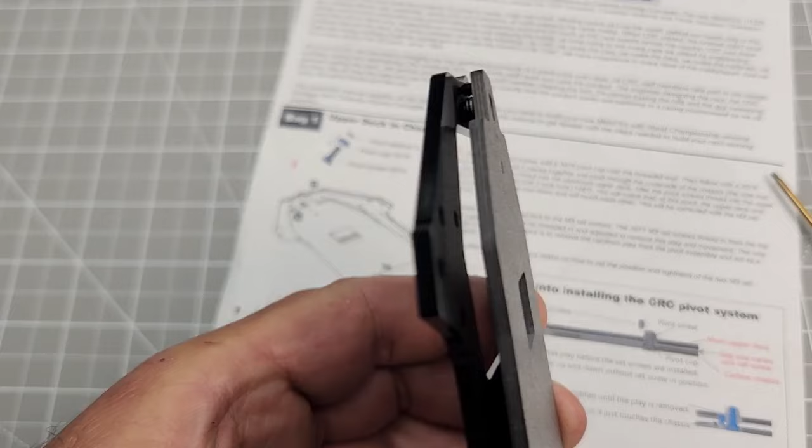So these set screws on the top will just be brought down just so they touch. So we'll just bring these down. And when they just touch, the upper plate will be free, but not bound, and pivot really smooth.

So I'm going to over tighten them on purpose, and I just snugged them a little too far. And you can see the upper plate isn't happy. It doesn't pivot real, it doesn't wiggle or slap around, or it doesn't pivot very good at all. So now we'll just take and loosen these just slightly, and again, we're just getting these set screws just a touch with and remove any of the play up and down.

And of course, all of these screws should have a little Loctite on them. So now that we've got it correct, you can see a nice free pivot, and it's just really very free in the pivot system, and there's no play in the screw going up and down. So that pivot is basically done, and you can see from the side here that set screw is just touching the carbon, and that's what you're after. Again, all those screws there should have a little drop of Loctite.

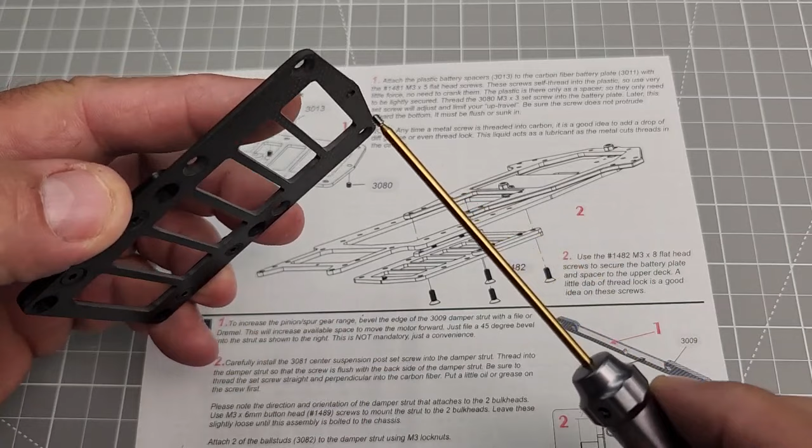Just to, okay, even though we've used some Loctite, we're going to go ahead and put some lock nuts on those pivot screws, just a matter of putting a lock nut on top. So be sure to hold the bottom screw when tightening the lock nut up on top.

And then that next step is really super simple. Just these little spacers go on top of the battery plate. The only reason we're showing it here is they're just spacers. You don't need to crank down on this very tight. You're just going to run these M3x5 flatheads up through into the plastic spacer and just really lightly snug it. It's just taking up space, no structural worry, no need to reef on it, no need to go crazy. Just simply thread it in and just 2-finger tight. It isn't going anywhere, it's going to be compressed between the upper plate and the chassis. So really no need to go crazy with it. So a piece of cake there.

Just one thing to note on these little spacers is you want this flat side. That's where the battery is going to go in. You see the rounded edges here, and the flat side will go inside toward the battery.

The next step in this is the extension limit screw 3080 is going to go up into the bottom of the chassis, or battery plate, sorry. That's super simple. Just keep it square and true, and just thread that stop screw up in, and it's really quite simple. Just make sure it's pass flush so you don't have anything dragging underneath the car.

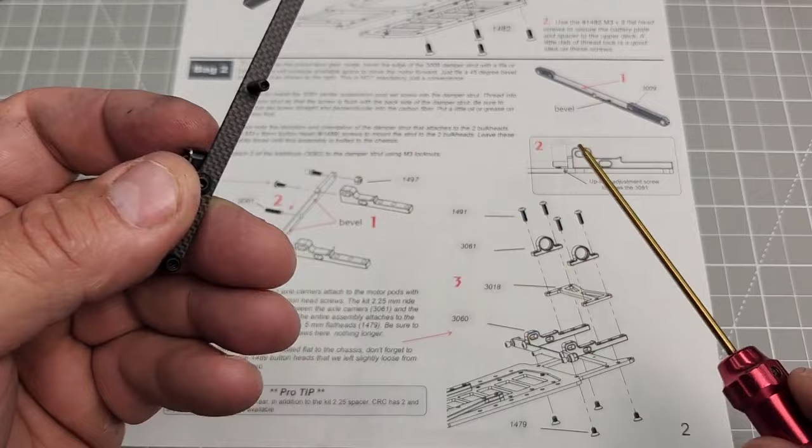And basically the battery plate's ready to bolt onto the upper chassis. Here we're going to bolt the battery plate to the upper chassis with these 3x8s. These are going in aluminum, so a little Loctite wouldn't hurt to keep that secure in the aluminum. Again, it's just nothing more than threading these in. Super simple. And just get them snug tight, and the battery plate is on the upper chassis.

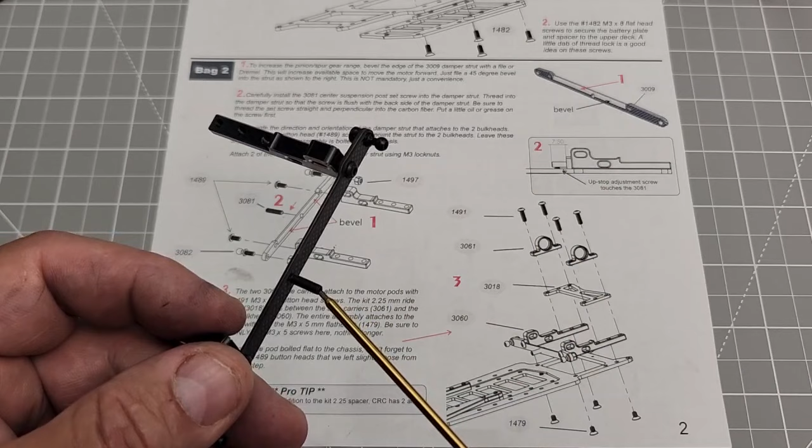And this is the battery plate attached to the upper chassis with the 4 M3x8s. And you got your extension limit screw there, pivots, battery plates in, and kind of already looking like half a car.

Okay, now we're putting the pod onto the chassis. Really simple, kind of just a bolt together situation. The only thing tricky is this set screw going into the carbon. Needs the thread in straight and true. A little Loctite or even grease will get that going easier. It's a super easy install.

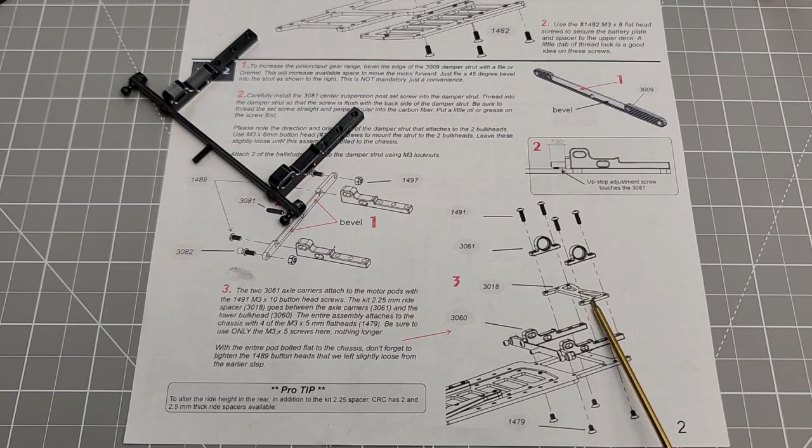The hole is sized very simply to just thread that in and keep it square and true, and you'll know you're about at the right length when the back here is flush with the back of the carbon. You should have 7.5 millimeters from the tip down to the carbon, as shown right here in the instructions. If this screw is sticking out too far, it will hit your battery, so this is key to keep an eye on.

Then you're just going to continue on with this. Put the ball studs on, screw it into the motor plates, and this whole assembly will go onto the chassis as shown down here. Just be sure to use the 3x5 millimeter flatheads here, don't use anything longer, that'll cause an issue. And as always, whenever you have a metal screw going into a metal piece, a little drop of Loctite won't hurt.

This is a 2.25 thick spacer for ride height, that's what comes in the kit, and we offer a thinner and a thicker. This will get you going around 40 millimeter tires and 3.5 to 4 millimeters of ground clearance, a good start. The team, when we race, is typically only on the stock one at 2.25. Typically works good, but we do have a couple adjustments there.

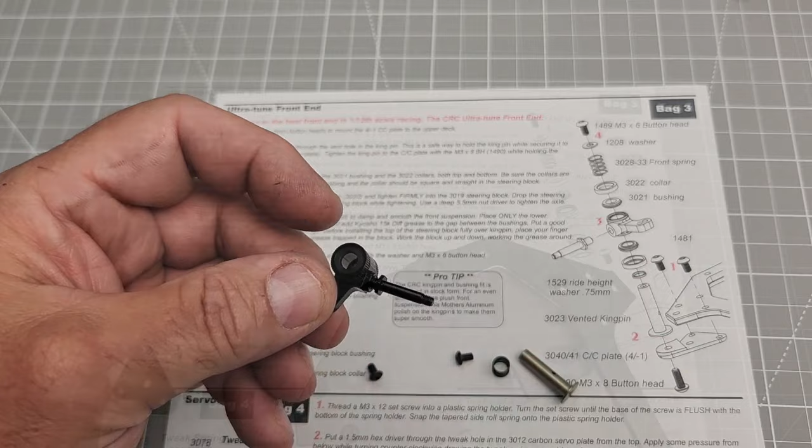So that's about it for the rear pod. One word of note: when you're putting the pod to the chassis, keep all of the screws a little bit loose until the 4 screws that hold the pod onto the chassis are secure. You'll see that the pod locates or keys into the chassis, kind of clicks in, and then you can secure it with the screws from the bottom. Once those 4 are tight underneath, you can go ahead and tighten all the auxiliary screws around it, like these 2 in the front and these 4 in the back. That'll just keep things real tweak-free, square, and really bulletproof. You see here's your stop screw sitting right above your adjustment, and your spring's going to come down and touch that. So that completes the pod.

Okay, onto the UltraTune front end, and yes, welcome to the best front end in 1/12 scale racing. We've got quite a really unique front end in the sense that it's very easy to change caster and camber. We use the 1/8 inch bearings for more durability. Here's a brand new one with no polishing, and the fit and finish is top notch, nice and smooth.

Hollow kingpin to hold more fluid, works really well. Got the aluminum collar, Delrin machine bushings, and a 1/8 inch steel axle that threads into the steering block.

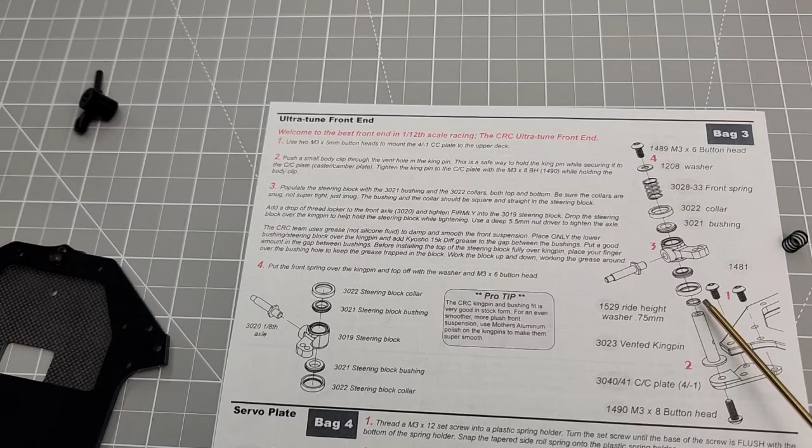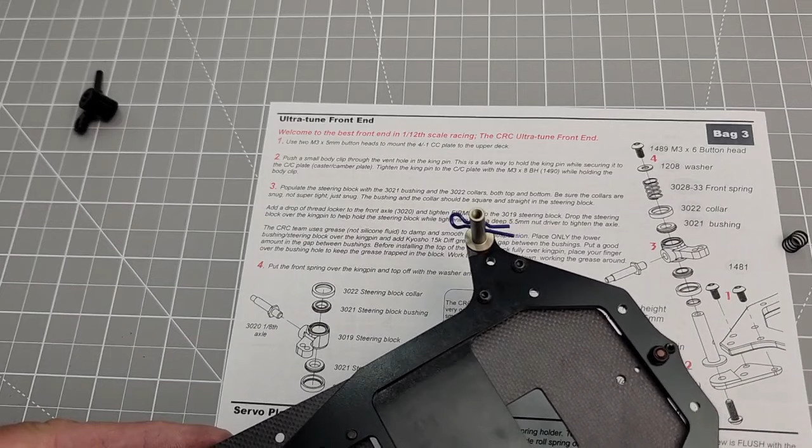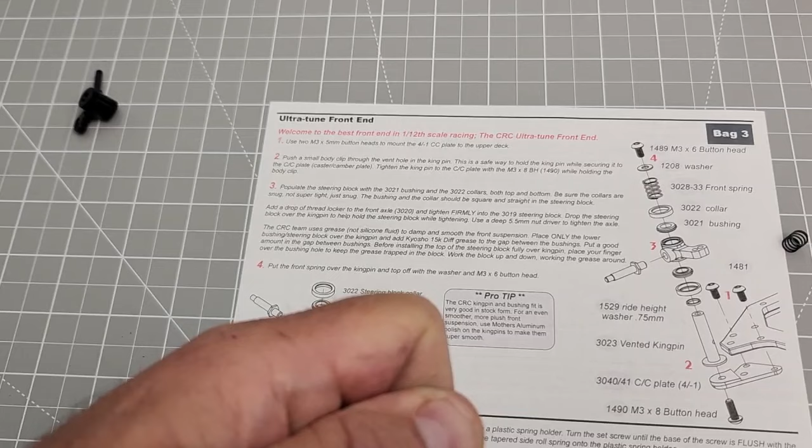And we'll go ahead and put this all together. Here's some of the magic of the UltraTune front end, this is your CC plate. The car is going to come with a 4-caster, -1 camber plate, and that'll machine match right into the upper chassis. You're going to use 2 M3x5 screws with a little dab of Loctite on them to hold those. Snug it down pretty good, and the basis of the front end is now on.

You'll do that for the right side, but we've got a whole range of camber caster plates, 4 degrees with just 0.25 negative all the way up to 4 with -2 degrees camber. And we've got the same thing pretty much in 5-degree caster as well. So that's a bolt on and go, and the basis of the front end. Kingpin will go on there in the steering block, and we'll be off to the races.

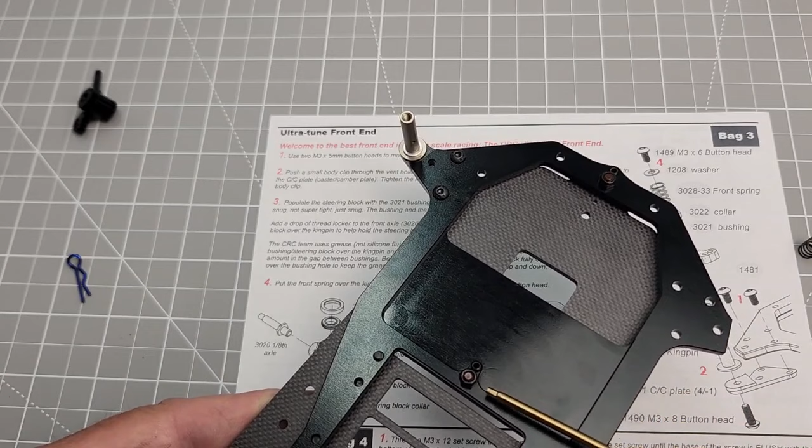Okay, following along with the instructions, you're going to bolt your 4, -1 camber caster plate to your upper chassis plate. And then, of course, your steering block, which already has all the bushings and collars together, will come down over the kingpin. One tricky thing is trying to hold the kingpin while you're tightening it, so we give you a body clip to use as a wrench. Stick the body clip through the hole, get yourself a good 2 mil, and just use the body clip as your wrench and give it a good crank. Of course, a drop of Loctite will help there, and now that's good and tight, and we can move on.

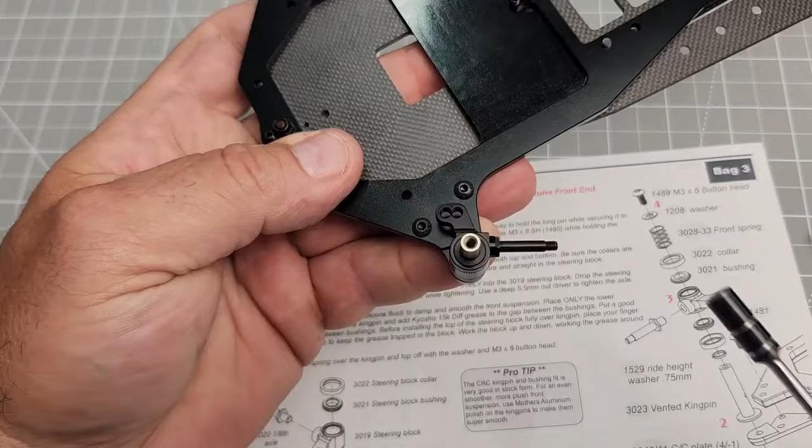These little 5mm spacers are 0.75 thick, a good start for ride height. You can use 1 or 2 of them, they come with 1, again pretty good for 40mm, 39mm front tires. You can change the ride height by putting a spacer there. You can also change the ride height in the front by changing the amount of washers in the pivot, so you can leave this washer and raise the whole upper deck a little bit.

Yes, you're raising the weight of the speedo a little bit to change ride height that way, but you can do it. So you can change the front ride height here with a washer, or actually you can raise the upper deck a little bit. Again, if you raise the upper deck, you'll have to readjust your set screws.

So per the instructions, we're going to use that 0.75mm, and then put the steering block over. And again, super smooth, no play.

Now here's a trick. You're going to want a nut driver that totally is able to go over the hole, have it bore deep so you can go over and catch it. And you can actually use your kingpin as your wrench.

This is something you definitely want a good Loctite on, and you want to tighten this one. Put some heat on this one and tighten it really secure, because a little Loctite and a good twist to get that good and tight will keep that axle on for good.

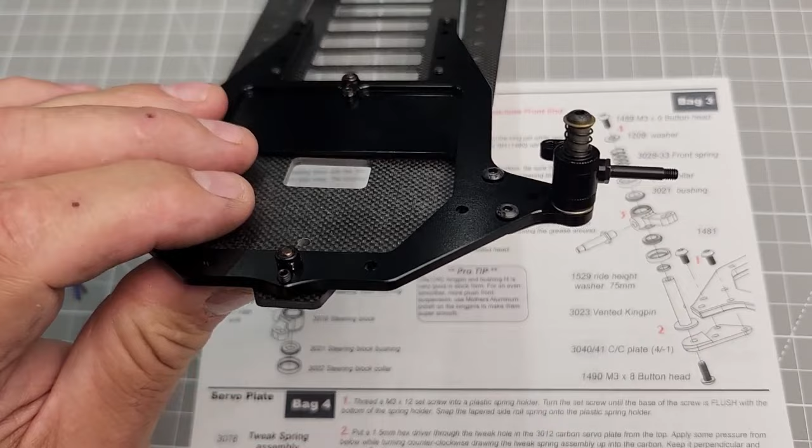And basically, you can see your ride height washer in there. Super free, super smooth. And if you want to get it even better, you can polish that kingpin. So far, the fit and finish has been right on the money. Don't really need to, but if you want to use some Mothers, you can make that even better.

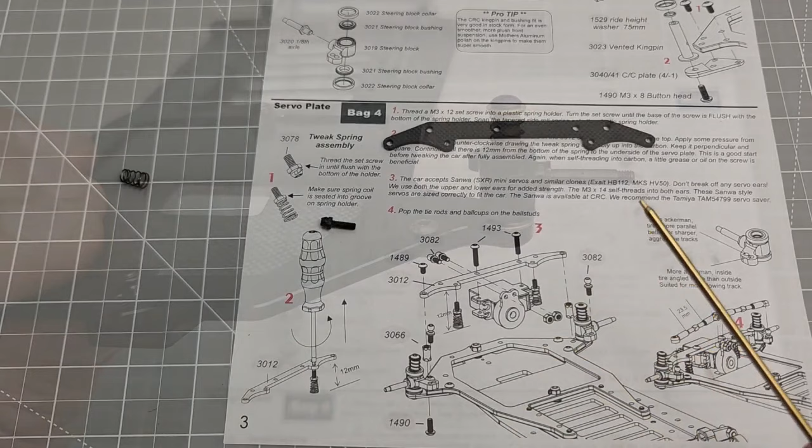Okay, again following along with the instructions, we're just going to drop the 55 front spring on, and we're going to go with our top screw to hold everything together. And if you want to play with preload, we're going to have a fine-tune video and some instruction on how to fine-tune the front end.

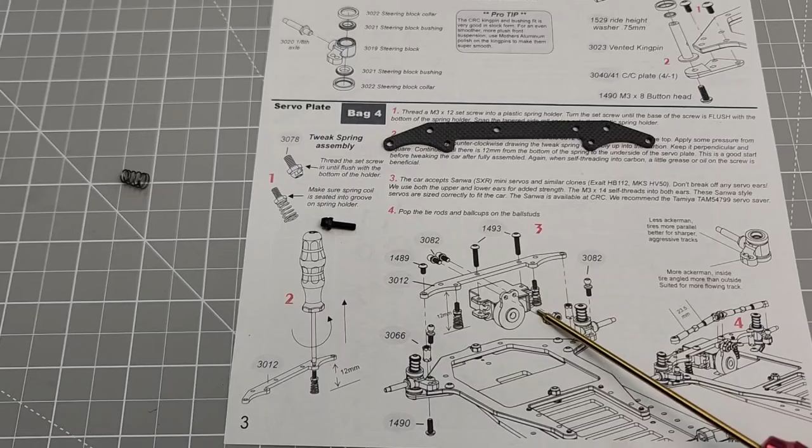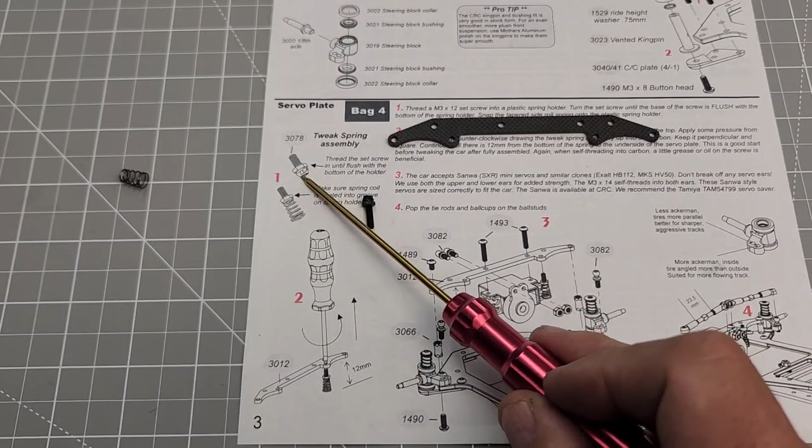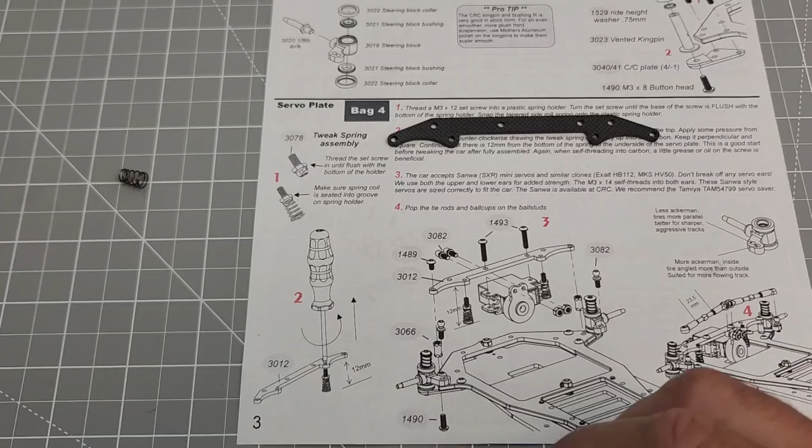Right now you could use a 5mm shim on top and actually preload the front spring. There's a number of ways to do it. Certainly a 5mm shim will tighten that up. But right now we're just going to go with stock preload, which is just the washer and the button head from the top. Again, metal to metal, make sure you're using a drop of Loctite, and instantly you have 4 caster and -1 camber.

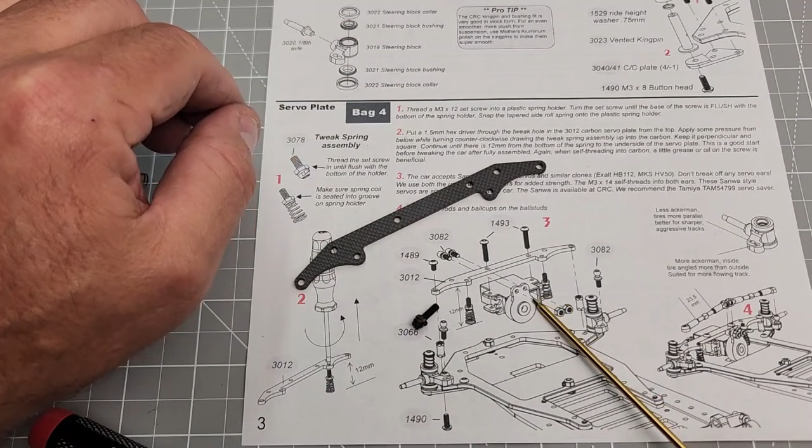No setup gauge, it's machined in. This kingpin don't spin. Yeah, we've hit some walls really hard. I'm sure you can bend it, we haven't yet, but we will. But it stays really true even in a big accident. So the front end's proven to be excellent.

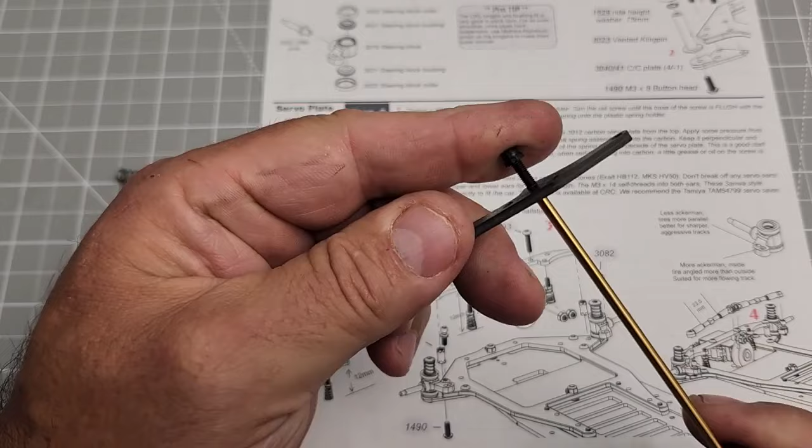All right, so we're going on to the servo mount. You just got to finish up the front end, and you'll end up with both sides on with the springs on both steering blocks. And now we're going to move to this area where the roll springs thread into the servo plate, the carbon servo plate.

First thing you got to do is get this assembly together. And you're going to get this set screw flush with the bottom of the spring holder. Nothing to it, pretty much just like the instructions said.

So you're going to run that set screw into the spring holder, and when the bottom of the set screw is flush, that's good and far enough. That's what I'm doing here. Now let me take it out. Yeah, it's about flush, pretty close. Let's go a little further.

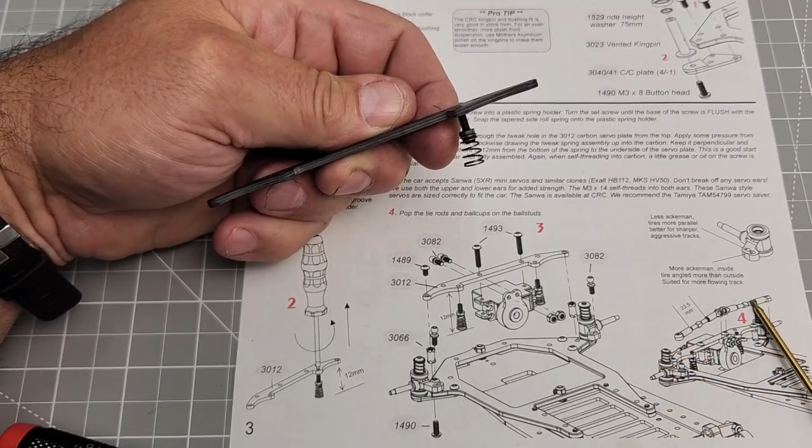And then, without putting the spring on, basically you have to determine if you want your servo left or right at this point. It's shown with the base of the servo to the right in the car, so we'll go ahead that way.

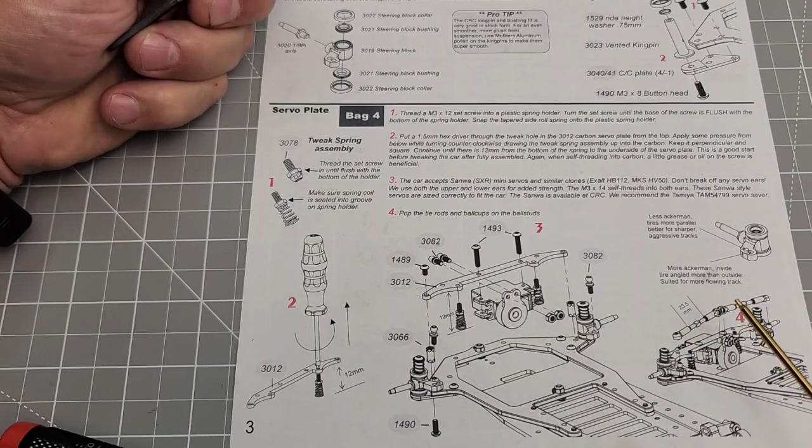I like to put the wrench through and bring your set screw from the bottom, and just push with your finger, and you're just trying to keep it square and straight. Again, a little bit of Loctite or even grease, anything to help that set screw get in the carbon.

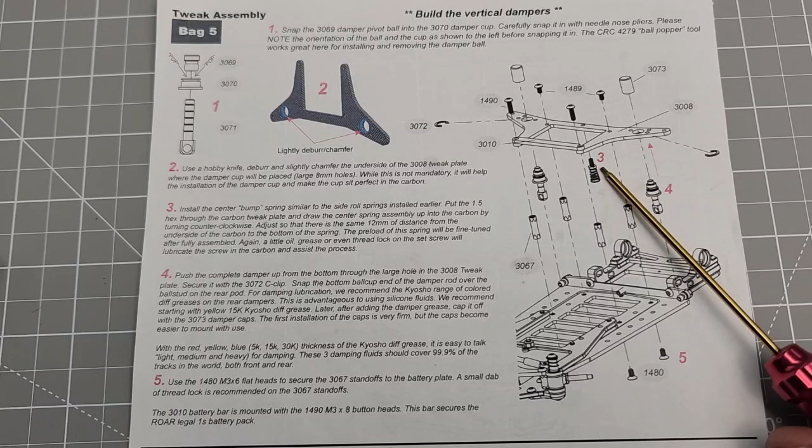And that does that. And then you're going to pop your spring on, and then you're going to measure from the bottom of the spring to the underneath of the carbon, should be 12 mil. That's just a start—once we get it all on and tweak the car, that'll change, but you're going to start with the bottom of the spring to the bottom of the carbon, 12 mil.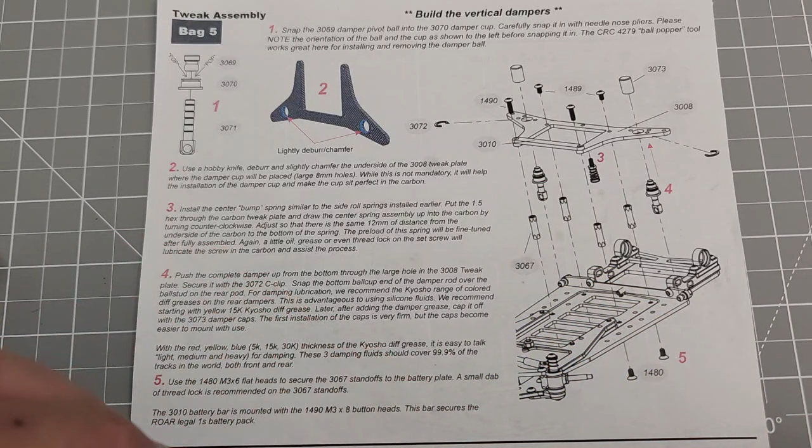Do that for both sides, and mount to the rest of the servo. We're not going to show everything, it's pretty much listed here. You got your tie rods. It's all pretty straightforward. I suggest you start with the outer hole towards the outside of the car—that'll give you more steering. And that'll be your front end.

All right, moving on to the tweak assembly. Again, these videos are just to highlight some of the more tricky items. The car build's really straightforward, and we're not going over every step. But anything that might need a little extra care or a note, we're trying to target in these videos.

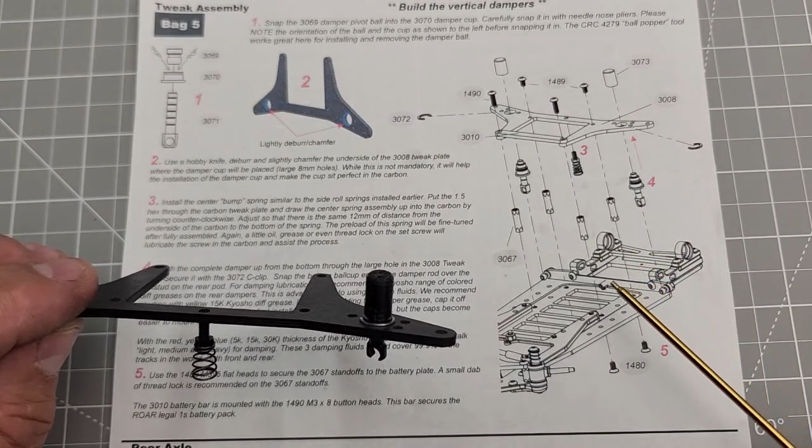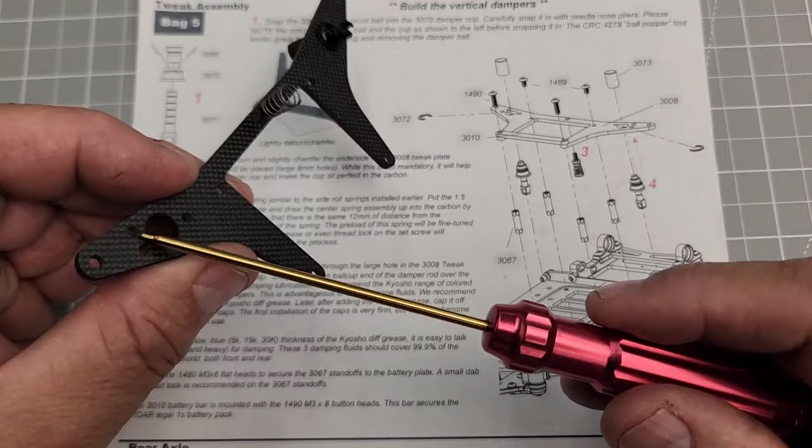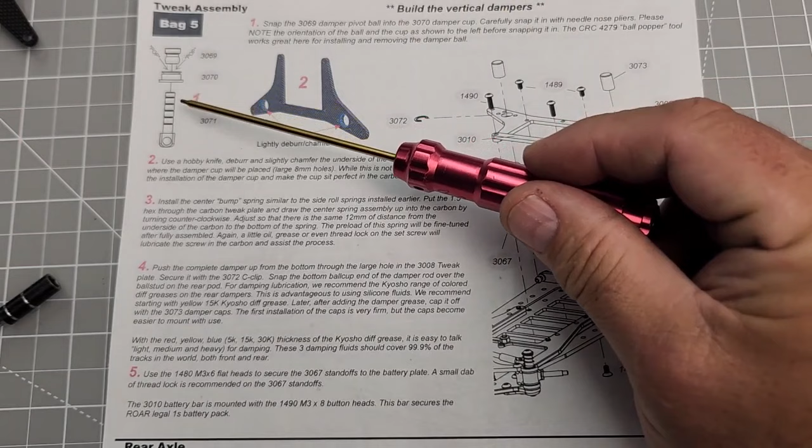Here, the center spring is much like the roll springs. You'll put the set screw into the spring holder, much like we did on the roll spring, so that the set screw is flush with the bottom of the spring holder. And then again, just like the roll spring, we'll put our wrench through the carbon, and we'll put the set screw here, and then draw it in, basically unscrewing it.

Again, a dab of Loctite or grease. We'll just make that go in smooth and just try to keep it straight, pushing with my thumb and just kind of drawing it in.

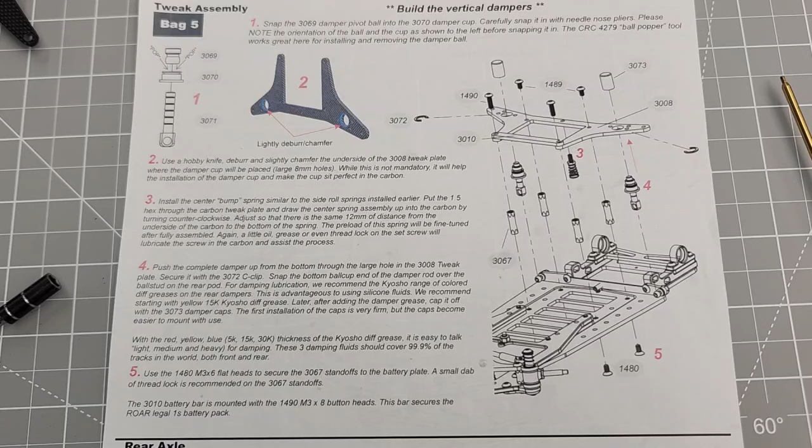And once we get that in square, again, same 12 millimeter gap between the bottom of this carbon plate and the end of the spring when we push the spring on. So that'll be the same. That'll be adjusted later, and that spring will sit right on that center post that we installed earlier.

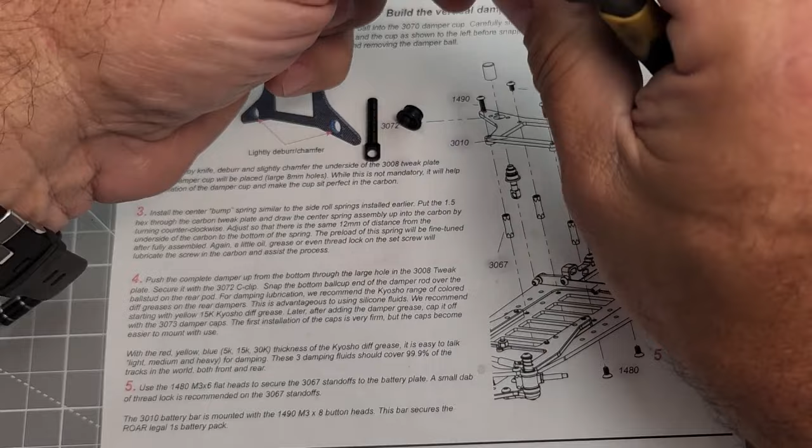The other thing on this step is, you see here highlighted in blue, you might want to just take the sharp edge off in this area with an X-Acto, anything to deburr it. Don't have to do it, but it makes the assembly a little better.

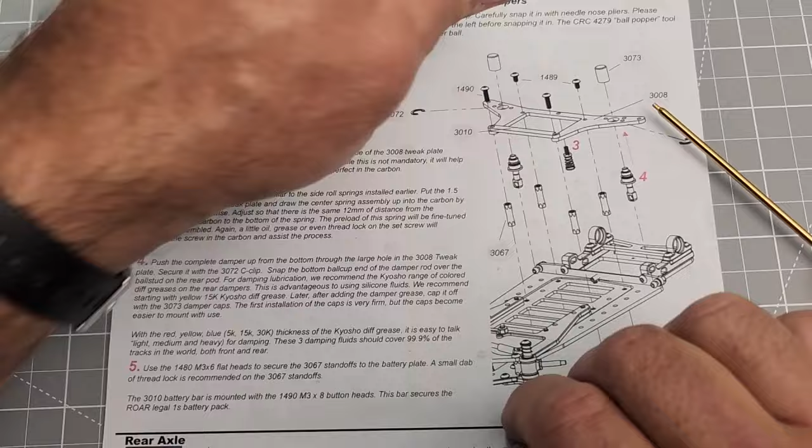And then what we're going to go on to next is the vertical dampers. I'm going to pop the damper ball into the damper cup. And then this is the damper rod. We'll push that up through, put a little Kyosho grease on it. And that'll be our damping.

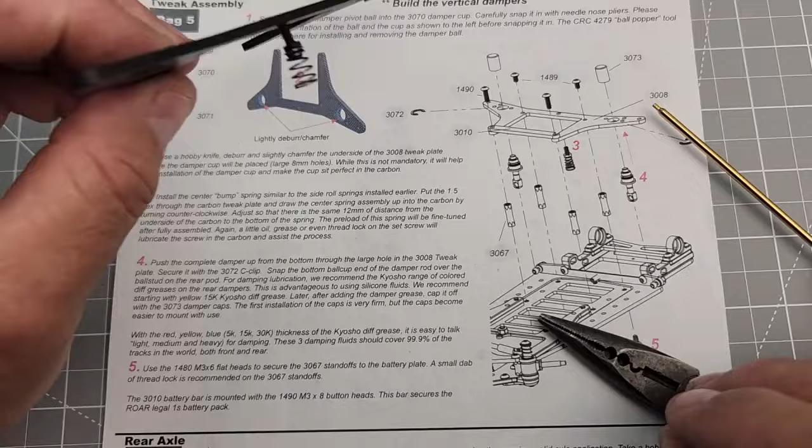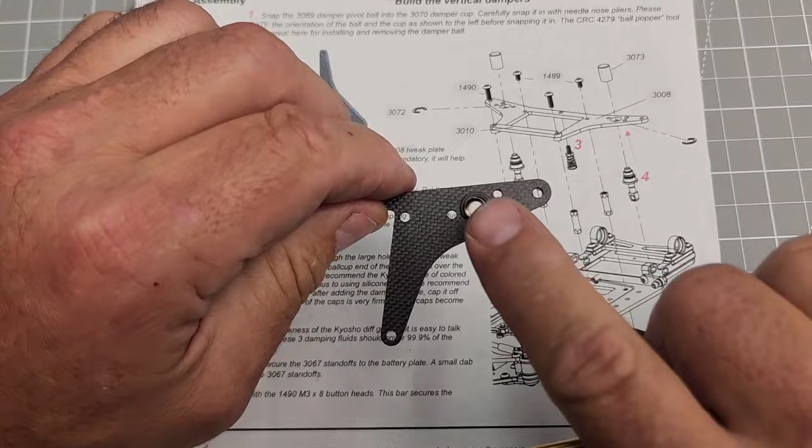Kyosho grease seemed to be a little bit superior than the silicone lubes. They don't leak down, they stay consistent. Silicone lubes will work, but we find that the Kyosho grease works really well. At the recent Trinity shootout, we tried 15K Kyosho and 30. We came back to the 15K. 30 was pretty heavily damped, so we've got plenty of damping in the side damper.

So let's go on and pop that together. We've got the vertical damper, the 3 pieces. Super simple. You can use the CRC ball popper tool to both assemble and disassemble this little cup, the 4279 CRC. But you can see here, all we're going to do is put this ball in the cup and use our pliers and really just a little squeeze, little pop, boom, that's it. And that spins free.

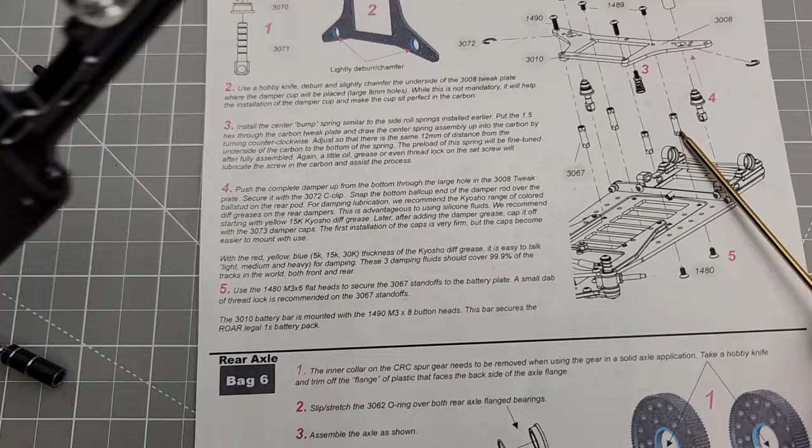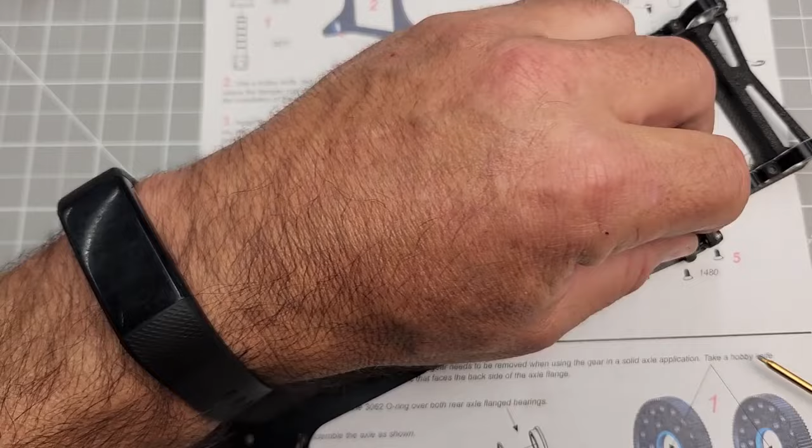And then we'll take our plate that we deburred, we'll push this up through the bottom, simple, and then we'll grab our retaining spring C-clip and put that in from the side here. You can just push it in with a tool, pretty simple, and there's your rotating vertical damper cup. And of course this rod here will go in and get some syrup on it and be your damper. These will pop over this ball down here, and when the car rolls, it is damped.

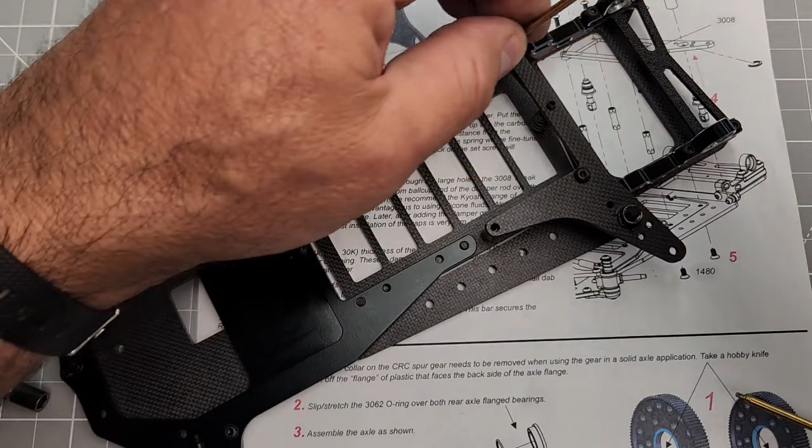Okay, now it's simply a matter of putting these standoffs down to the battery plate with these M3x6 flatheads. A little Loctite might be a good idea here on those screws. Run them up into these standoffs. Remember, this is the MetriCKs, so this is 4.5 millimeter standoffs. You'll need a hex wrench to hold them, and you'll end up with something like this.

And then your top plate will go on from above, like that. But before we do that, we got to pop on the damper rod. So the damper rod goes over the ball, and then just snap on. Can't really see it, get into focus. Just click it on here. And then put that up through there.

We use a 3x6 button for the back screws. Pretty easy, I'm only showing one damper here. And then another M3x6 button.

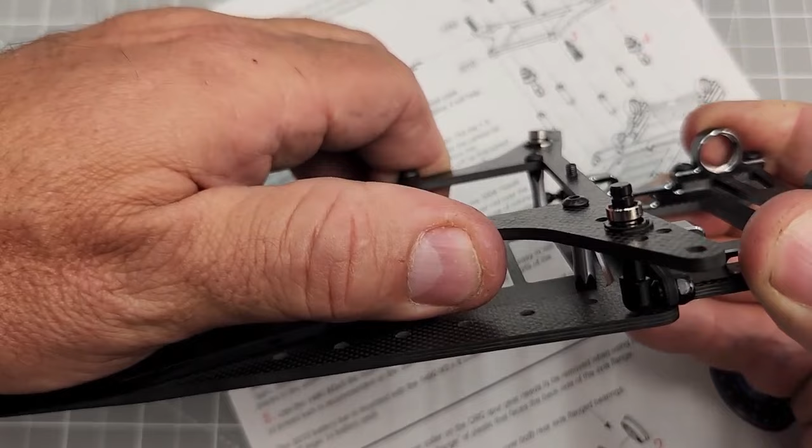And then your battery bar, which holds in your battery. This is where your battery bar will go here. And I've cut my battery bar. I'm cheating. Your battery bar will come complete.

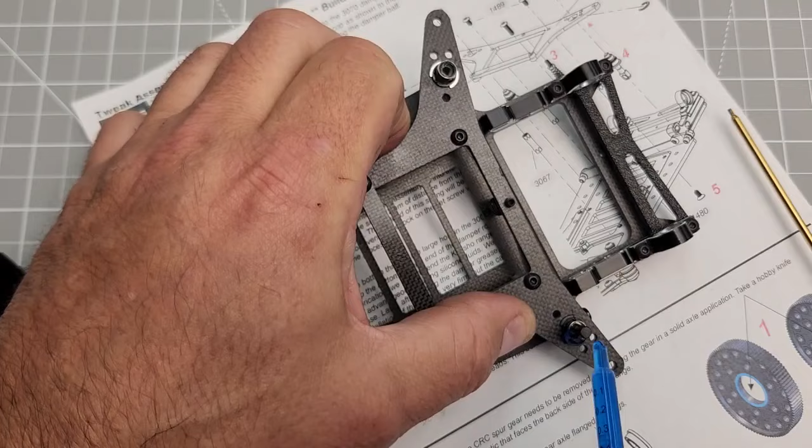I turned mine into a battery door because, yeah, I'm lazy. So when I take my battery out, I just loosen this screw a little bit here. Loosen it, and loosen this screw a little here. And your battery will go in and out this door if you choose to do that, because I never hit anything when I race. Haha. So far I haven't had any problems, but you can turn this into a battery door, but this will come to you closed and it will bolt here.

And if we switch over to look at our center spring, it's resting on our center pivot post, and then our extension set screw, which is going to limit the amount that the chassis pulls when you hit the gas, how much down travel you get, if you will. How much, like that, that's what that set screw adjusts. This is the preload on how much the car will sag into its suspension.

This screw will adjust your battery height. The more you tighten it, it'll lift the battery up. And then for damping, I just like to use Kyosho grease. I like to kind of squish that, put that right in there, and just kind of work it in.

So after you've put your Kyosho grease on your damper, you can put your damper cap on, and that should keep it packed in there. Some of the guys have been putting grease in the cap and then putting it over, but that's damped pretty well.